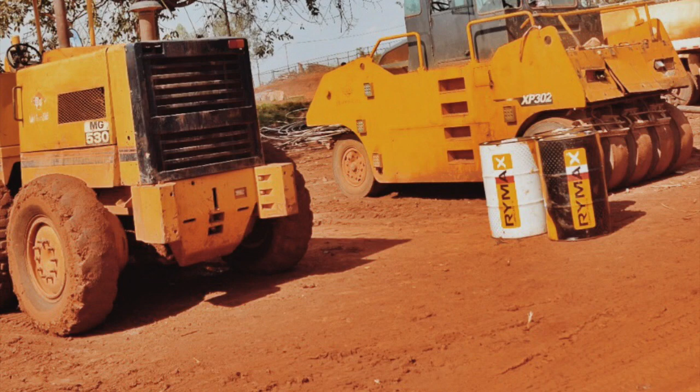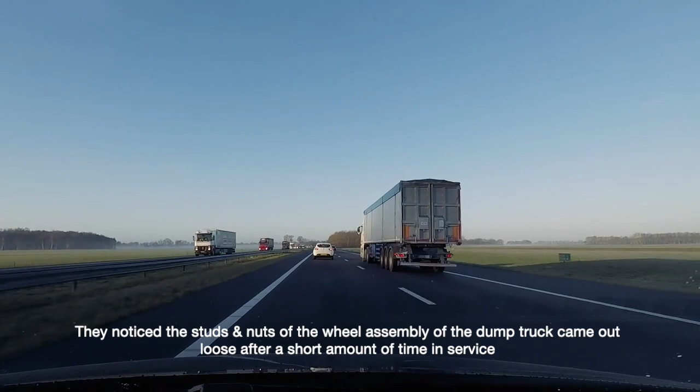It was an earth mover manufacturing company. They encountered a usual but dangerous problem. They noticed the studs and nuts of the wheel assembly of the dump truck came loose after a short amount of time in service. Since then, it had been a long-standing problem for them. The design engineers attempted to fix it, but the issue kept recurring. They tried several tricks that didn't work as intended. An unexpected newcomer, a fresh graduate, enters the scene. He was assigned to take on the challenge and tackle the problem that had been plaguing the department.

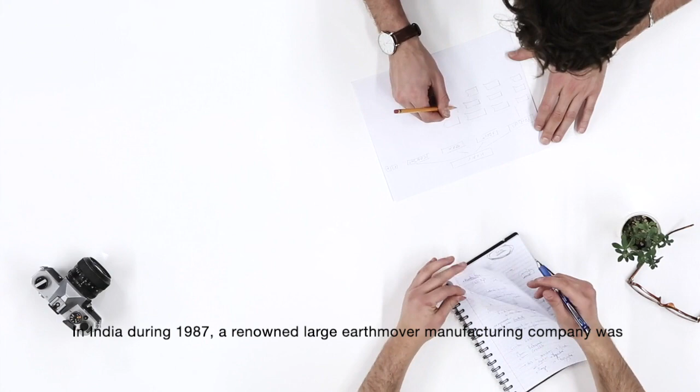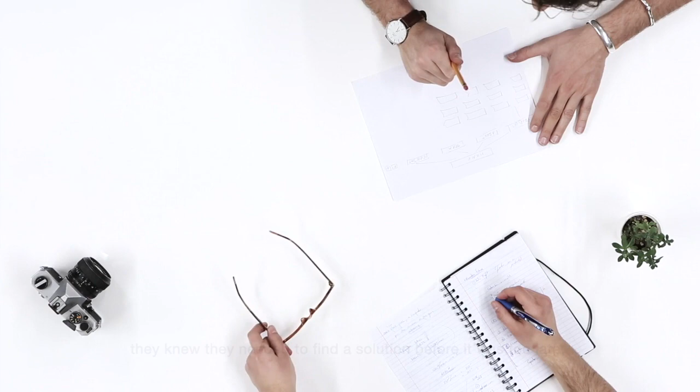In India, during 1987, a renowned large earth mover manufacturing company was grappling with a common but dangerous design issue. This was causing a major safety concern for their products, and they knew they needed to find a solution before it was too late.

Despite the tireless effort of the design engineers, several attempts to fix the issue proved fruitless. The problem was, the studs and nuts connecting the wheel and the tire rim were coming loose after a short amount of time in service. This left the company scrambling for a solution.

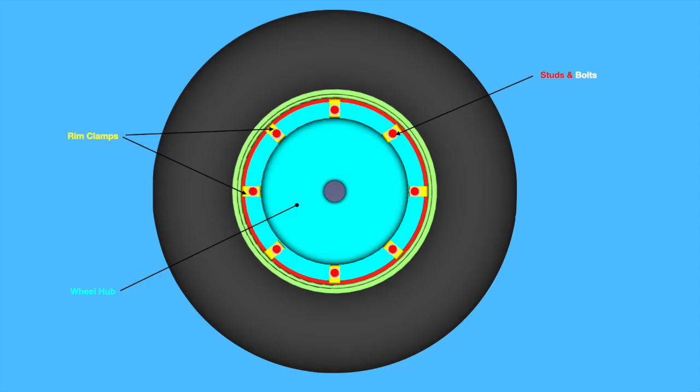Let's get into more details. This is a view illustrating the placement of the rim clamps in their original position. In fact, there were 32 or 16 studs and nuts set on the wheel hub, and for the sake of clarity I have shown only 8 sets.

This is the state that had failed. See the circled clamps that turn a bit, loosening the nuts. Here I have shown just 4 random clamps that got displaced in this animation.

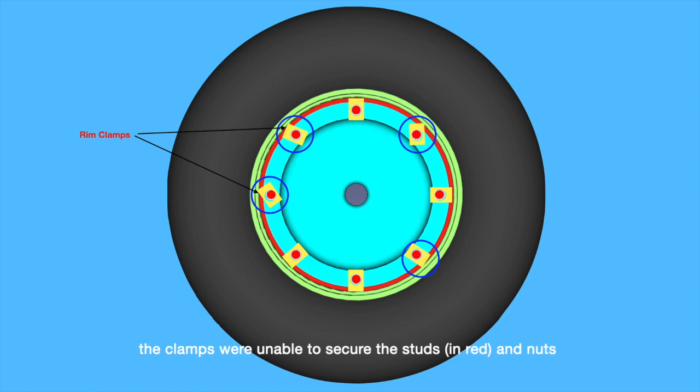Despite the engineer's initial design, the clamps were unable to secure the studs shown in red, the nuts shown in grey, and maintain the integrity of the wheel and tire assembly.

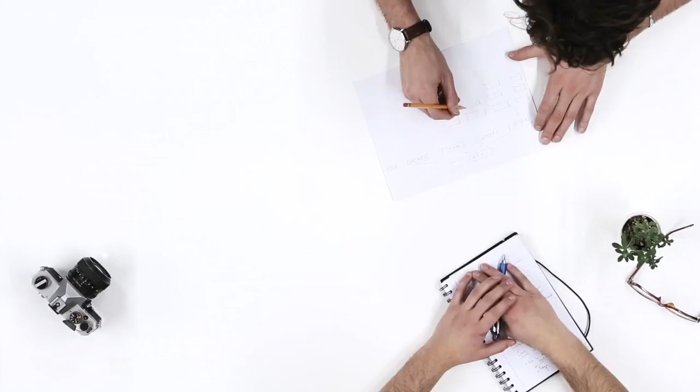Hence, they retorqued the nuts every time to bring them back to the original torque. In an effort to fix the problem, engineers made several changes to the design, not only tightening torque. They altered the bolt material and clamp material. They introduced bolt lock to prevent loosening and even heat treating on specific parts.

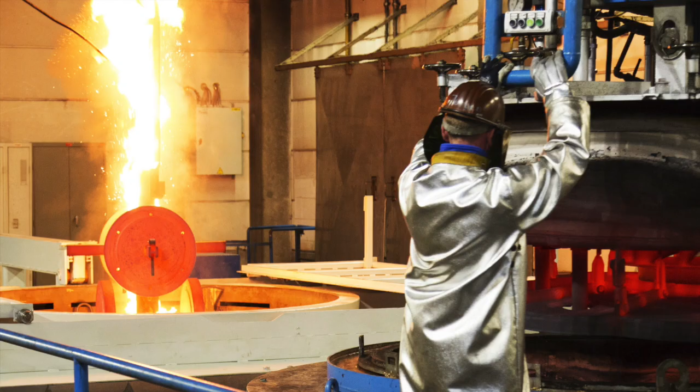However, despite their best efforts, they were unable to find solutions by solely focusing on the failed parts. The issue persisted and the search for the answer continued. Their sole focus was only on the clamp and the stud and nut assembly.

At that juncture, our young freshman, designated as a product engineer, was assigned to this problem. He was a fresh young graduate who had just completed the orientation program organized by the company. His role was to handle incremental design work such as field failure analysis, corrective actions, and cost reduction. The first task given to him was to solve the persistent problem of rim clamp loosening.

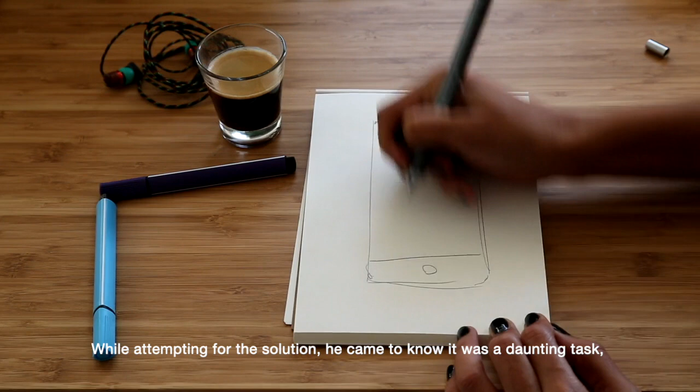While attempting a solution, he came to know that it was a daunting task, and he was determined to find a solution. He gathered all the necessary part drawings and began preparing a layout by assembling the parts on the drawing board. Within a couple of hours, the layout was reasonably ready and the problem was popping out its face uncontrollably.

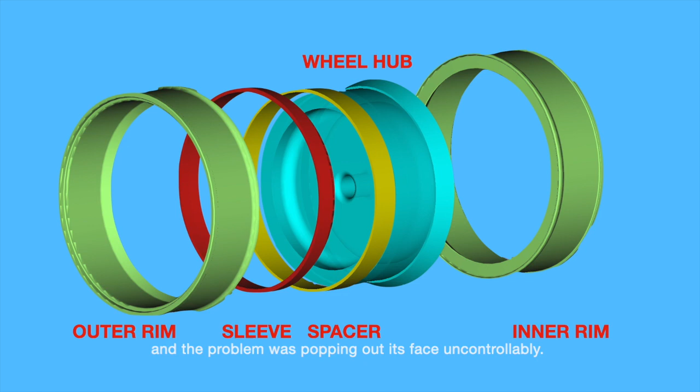Yes, there was a serious design flaw that the young man was able to spot within a couple of hours. The engineers had missed one fundamental issue.

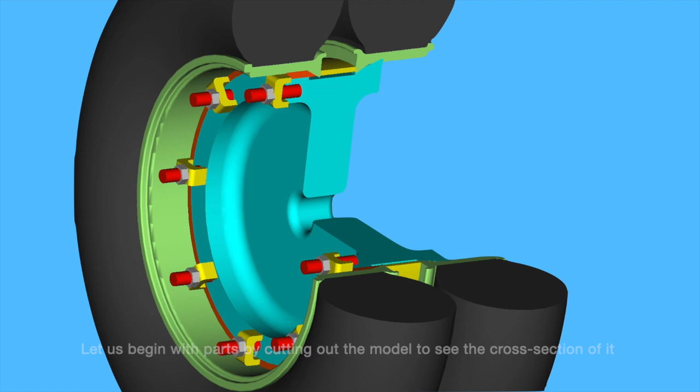To figure it out, it's necessary to understand the geometry configuration, how the forces were transmitted from the rim to the wheel. Let's begin with the parts by cutting out the model to see the cross-section of it: the wheel hub, outer and inner rims, a sleeve, a spacer, and of course the tires.

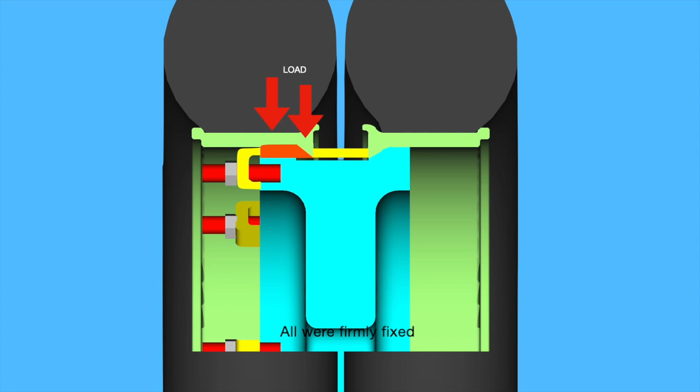The fastening system clamps the rim onto the rear wheel hub of a 35-ton off-road dump truck. There were many forged steel clamps and studs, high tensile and properly torqued with Loctite. All were firmly fixed. The studs can withstand several hundred tons of weight.

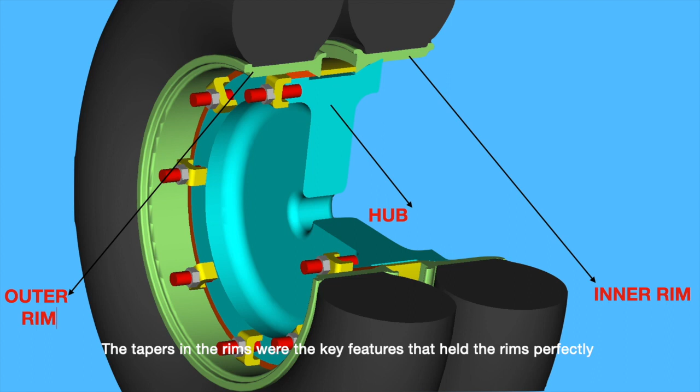The axial force of the sleeve locks the inner and outer of the two rims by friction. In other words, there has to be a sufficiently rigid surface on either side of the wedge-shaped feature to keep things in equilibrium. The tapers in the rims were the key features that held the rims perfectly concentric to the wheels and enabled

the load to be transferred efficiently. Something caught his eyes. The young engineer noticed that the inner rim wedge was getting proper support from the wheel while the outer one was not. There was a gap underneath.

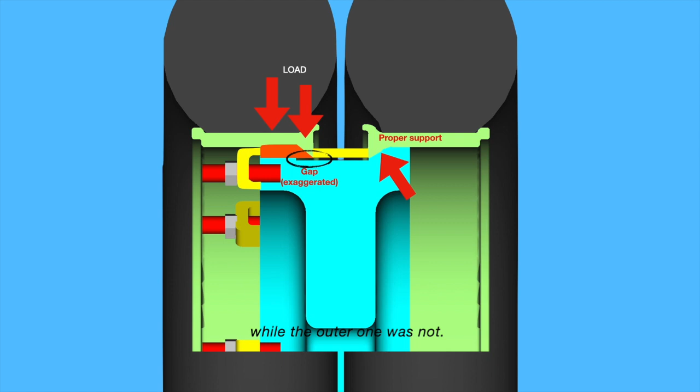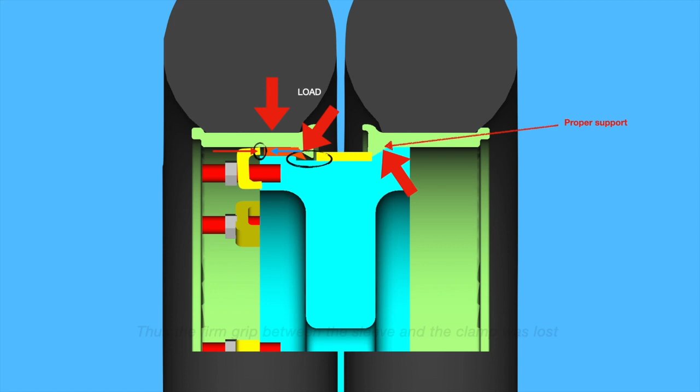This gap was causing the outer rim to bend slightly and the clamp to come loose. Thus the firm grip between the sleeve and the clamp was lost.

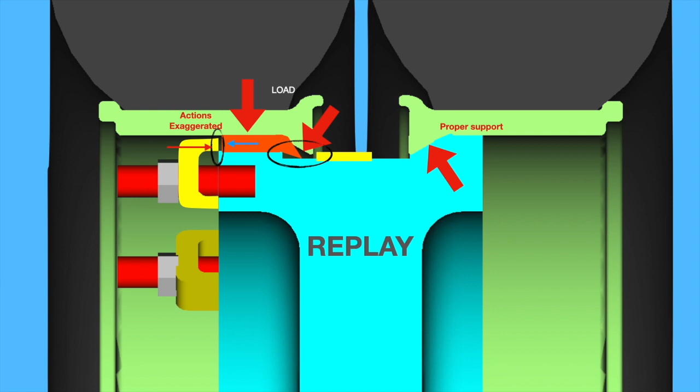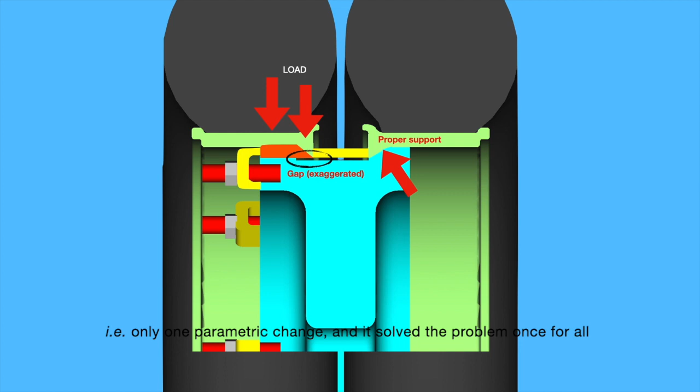The young engineer was then able to make a critical design change with one masterstroke. There was only one parametric change and it solved the problem once and for all. All that the engineer did was fill the gap beneath the sleeve. It needed to be filled with material.

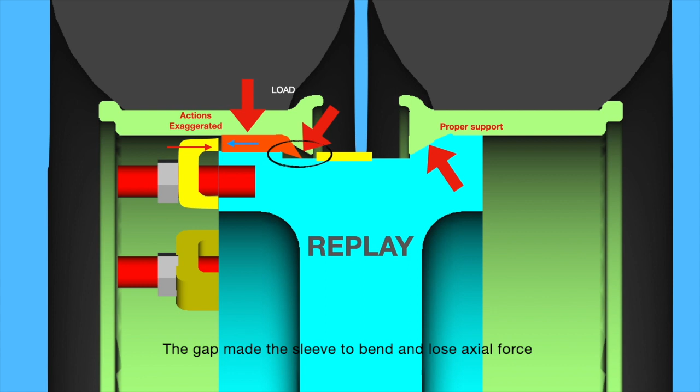The sleeve was not expected to withstand any vertical load by bending. The gap made the sleeve bend and lose the axial force. This change provided proper support to the outer rim wedge, which solved the problem and prevented the clamps from coming loose. This was a major breakthrough for the company.

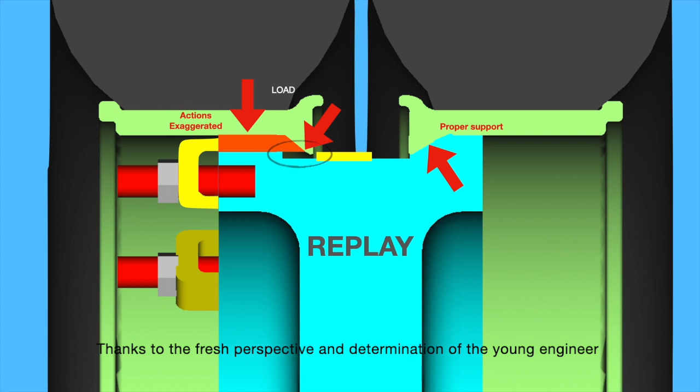Thanks to the fresh perspective and determination of the young engineer, the problem was finally solved after so many failed attempts. In simple terms, the problem was solved by making a small change in the length of the sleeve contact, which altered the balance of forces between the inner and outer rim wedges. It was a small but critical change that brought a profound impact in solving persistent issues that had plagued the

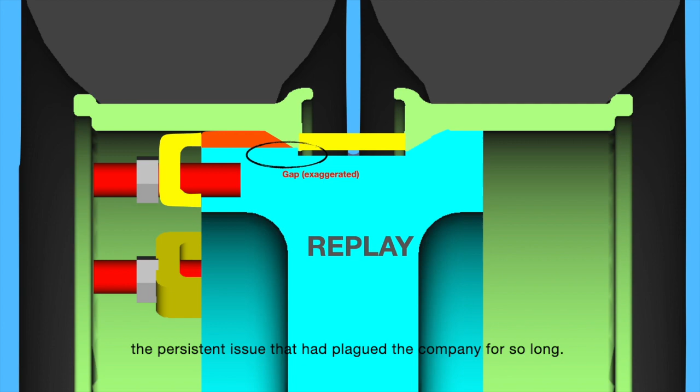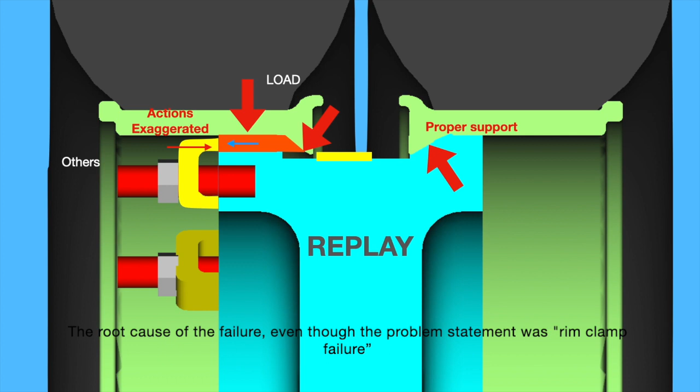company for so long. This case serves as an example that part failures should not be analyzed in isolation. The root cause of the failure, even though the problem statement was a rim clamp failure, was not with the rim clamps or the nuts, but with the sleeve length and the gap beneath the sleeve.

Hence, the nut used to lose torque, causing the clamp to come loose and shift out of place. This was a dangerous and unacceptable issue.

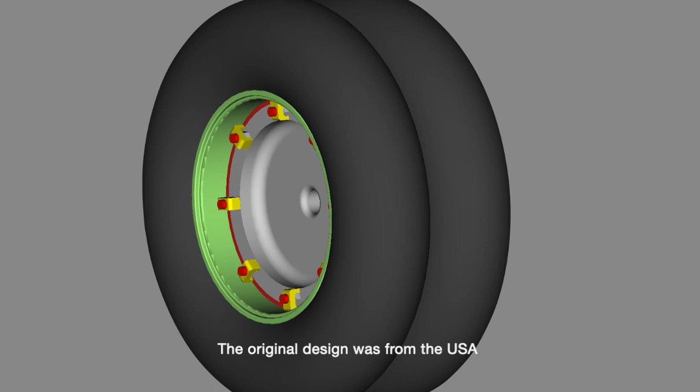What caused this problem? The original design was from the USA, and since tire sizes varied between countries, they changed the design accordingly. The problem likely started when they used a locally available tire that required a change in some of the sleeve and spacer dimensions.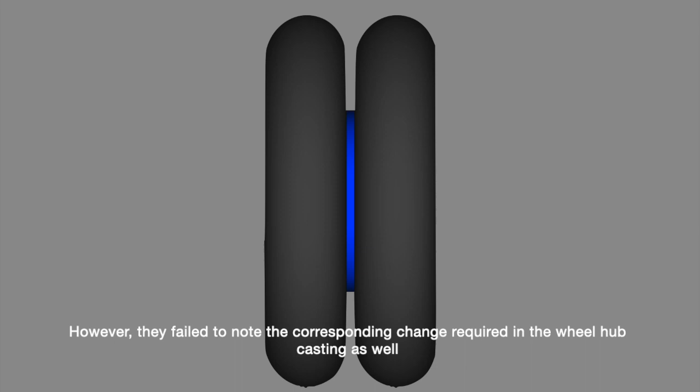However, they failed to note that a corresponding change was required in the wheel hub casting as well. This oversight led to an imbalance of forces between the inner and outer rim wedges and failure of the rim clamps. Though the young engineer was not credited for his findings, he went on to win several laurels later in

his life and eventually retired as a successful executive. Now he enjoys his life as a freelance design consultant. In addition to his professional accomplishments, he also made a difference in the lives of others.

He took in an uncared-for dog that had lost its two hind legs. A shelter home rescued the dog Vera from the street and he adopted it from them and designed a cart to support its rear body. This effort went viral on social media and was eventually praised by the Indian Prime Minister Mr. Narendra Modi in the 2020 Mann Ki Baat show.

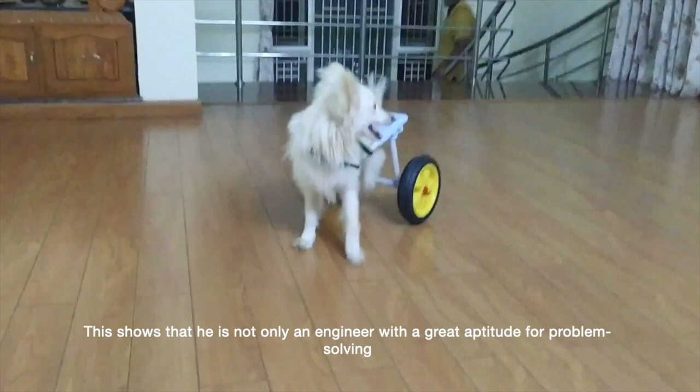This shows that he is not only an engineer with a great aptitude for problem solving, but also a kind-hearted person who cares about the welfare of others, both human and animal alike. He is none other than Mr. Kasi Arumugham, a well-known personality to many as well as on social media for his soft voice for society.